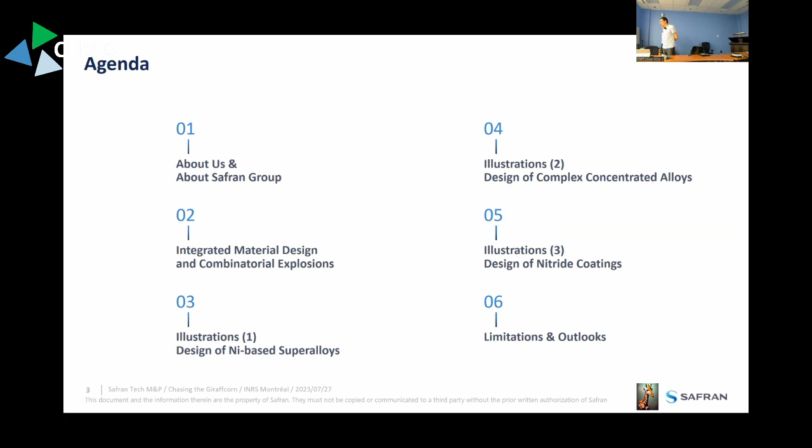And then we'll go through a few examples. I've listed three, I have one more. So I'm mainly going to explain things on nickel-based superalloys. Then I'll go through high entropy alloy design, or complex concentrated alloys as they came to be known. And then we'll talk about nitride coatings, Marjorie will do this part. And then we'll give a few outlooks, which I would be very happy to discuss with you in all generality.

I'm going to just say that the work we're going to present here has been done in a lot of laboratories with a lot of collaborations that I'm not going to mention, but I'm going to present some of my PhD thesis work and postdoc work. So I have been far from alone in this.

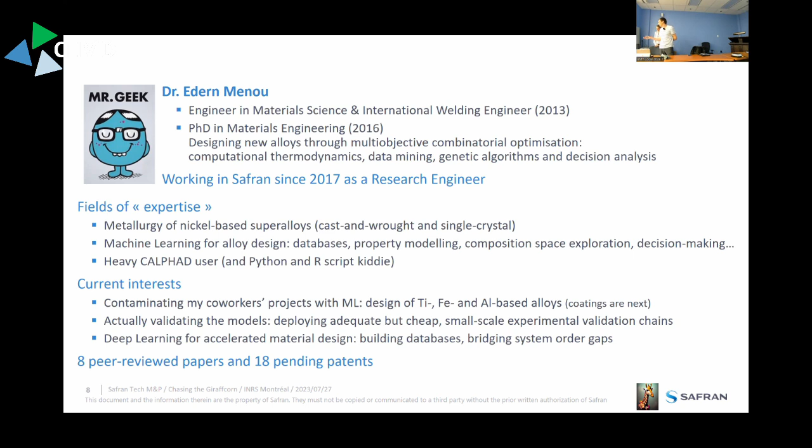But I'm going to just switch that, if you're fine, because I think we all know. This is an actual picture that my PhD advisor used at a previous conference. So I guess this one could have been put in place.

So I'm going to let Marjorie do the introduction of the group, if you want. The idea is just to give you a brief overview of our group. It's something quite big.

We are working in aeronautics, space and defense. Just a few figures, I won't go through everything, but as you can see, we mainly make aircraft engines. We are very well known for this, but also helicopter engines, landing gear, and interiors for cabins. We also work on everything about drones, for example, and some space surveillance, maybe not so well known, and high performance optics. So we did some optics for the Very Large Telescope, for example, or for space telescopes.

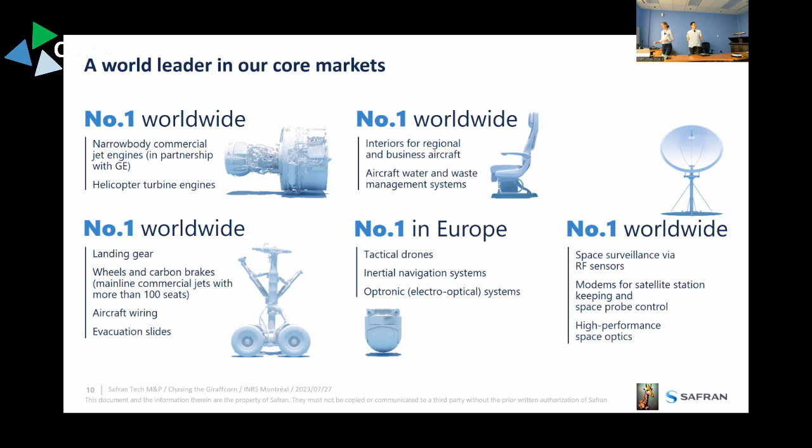We are a French group, so really French, you can hear it with my wonderful accent, I know about it. But we are around 83,000 people, you can see, in almost 30 countries. What you can see is that in Europe we are more than half of the group. And when we say in Europe, most of us are in France. We have some people in UK, Belgium, Spain, and so on, but the big part of the group is in France.

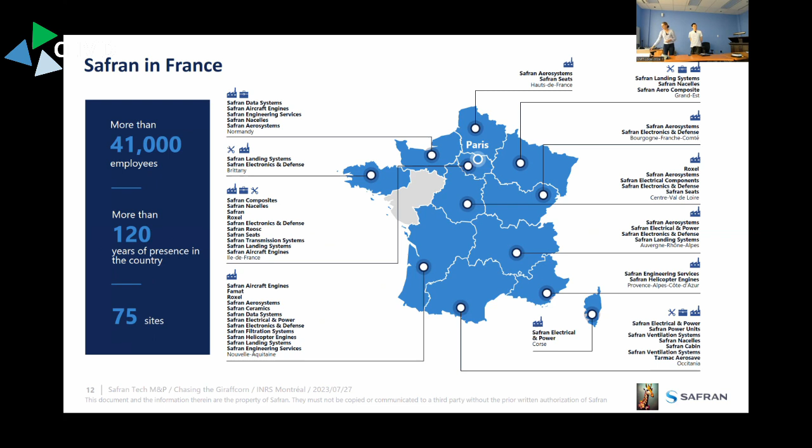Safran is here, but we are also in Canada, so that's why we have a lot of collaboration with Canada, because we have employees in Canada. Most of them are in Quebec, but not all of them. You can see we are in Mirabel, Kirkland, Ajax, London, and Peterborough, so let's say almost Toronto. It's quite far away from Toronto, in fact, but it's some big companies of the group.

As you can see, electronics and defense, we also have a landing system in Ajax, Safran Landing Systems, and Safran Helicopter Engines. Our colleagues that are more recent in our group, Safran Cabin, maybe you know them as Zodiac. We just bought Zodiac Group in 2018, I think, something like this. So now we also have everything about cabins, which we didn't have a few years ago.

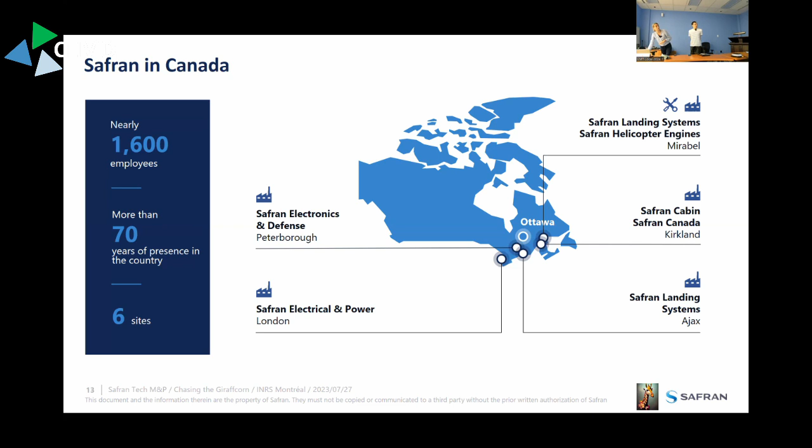Just a few overview of our product. We work mainly on aircraft propulsion. So when we say aircraft propulsion, it can be aircraft engines, helicopter engines, but also nacelle and engine equipment.

What you can see on the right of the slide is a power transmission for engines. So it's quite an important part of the engine.

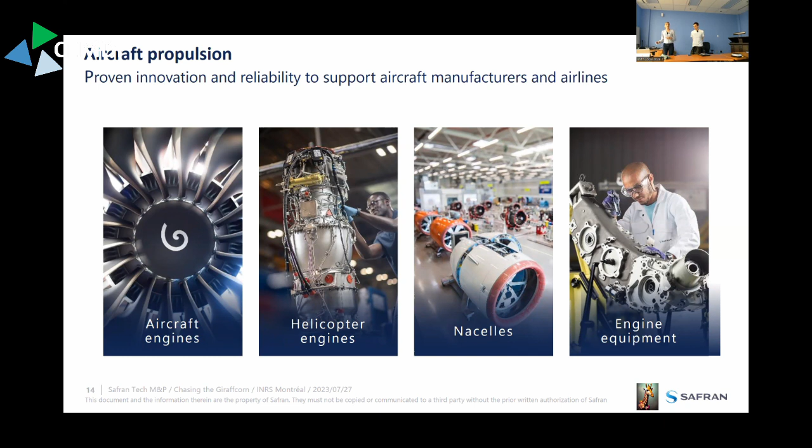We have also some aircraft equipment, so landing system. When we say landing system, it's both landing gears, but also wheels and brakes, so carbon brakes, for example.

Everything about electrical system, I didn't put the slide here, but there is one I like that says in a traditional commercial aircraft, you have around 500 kilometers of cables. So it's just huge. We know how to organize, to put everything as it should be together.

Something quite funny also is to know that it's just people doing by hand. Everything is done by hand when we speak about wiring in an aircraft.

We have a big activity on avionics and electronics. So everything about guiding for military aircraft, for example, but also for commercial aircraft.

And when we say aerosystems, it's safety equipment, for example. So the slides, for example, it's also made in Safran.

For a few years now, we have what we call aircraft interiors activity. So you have everything about the cabin, everything about seats and passenger comfort, entertainment.

Maybe some fun facts when we say cabin. We have everything in the cabin, but also galleys, toilets, water management. We say water management, not toilets, but we also do toilets. Okay, somebody needs to do it.

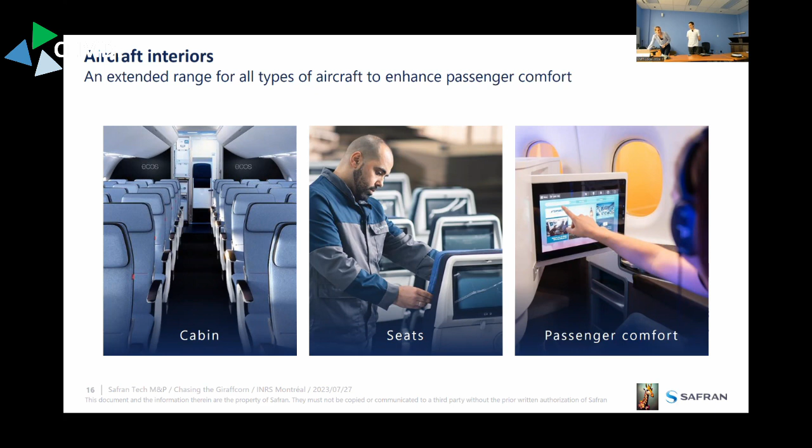And if we have a look to defense activity, everything about navigation and guidance. So for aircraft, for boats, for example, can be for almost every vehicle, in fact, depending on the precision of the navigation and guidance we need.

We have a lot of optronics for soldier. Drones and robotics. There is one drone that was fully developed by Safran, that is the first French drone. Up to now, we were using even in our army American drones because we didn't have our own one.

What we call dismounted warfighters. Let's say everything that will help a fighter when he is really all alone with nothing to help him. And we have some guidance solution for missile, for example.

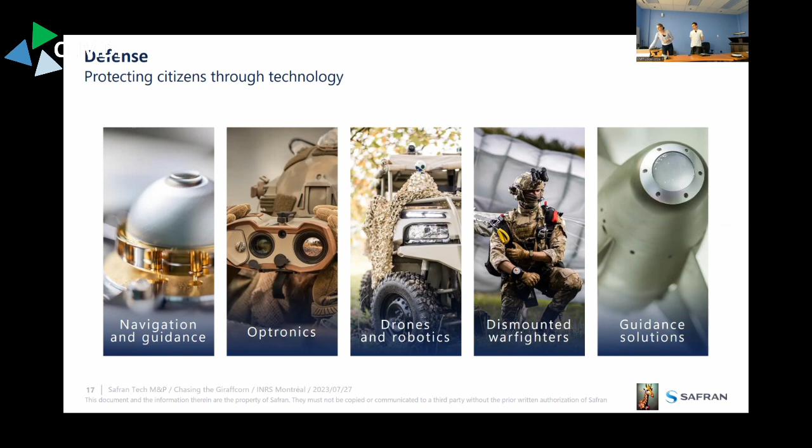If we move to space, we have everything about launch vehicles. So it's through a joint venture. Before it was everything in Safran, and for I think 4 or 5 years now, it's through what we call Ariane Group. We have a very specific activity on satellites that is all about plasma physics, so I can speak of plasma physics here.

It's very, very nice. It's what we call a plasma propeller for satellites. So we have the very small one, only for positioning in space, and right now we have bigger ones.

When you launch using your rocket or whatever, now we can use only electric plasma propulsion to go to the right place. So it's something very new.

The first ones were launched 1 year ago for some defense application in France.

We also have a lot of work on ground station and how they communicate together and with space. And everything about space optics, we have a small company totally dedicated to space optics in our group there in France as well.

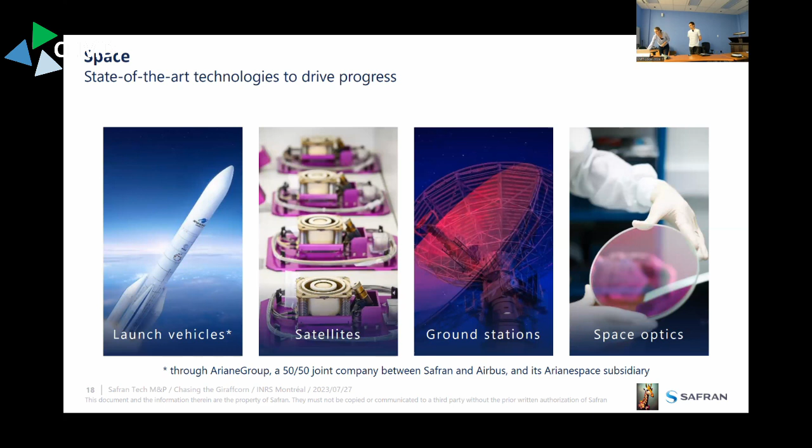Just to show you, I won't comment at all. I have 4 like this, I won't comment. The idea is just to show you in Safran, we do, let's say, almost everything in an aircraft, but the aircraft itself. So everything inside, it's us. The aircraft, it's not, it can be Airbus, Boeing, or whatever. But we have really plenty of products with a very different technologies, materials, application.

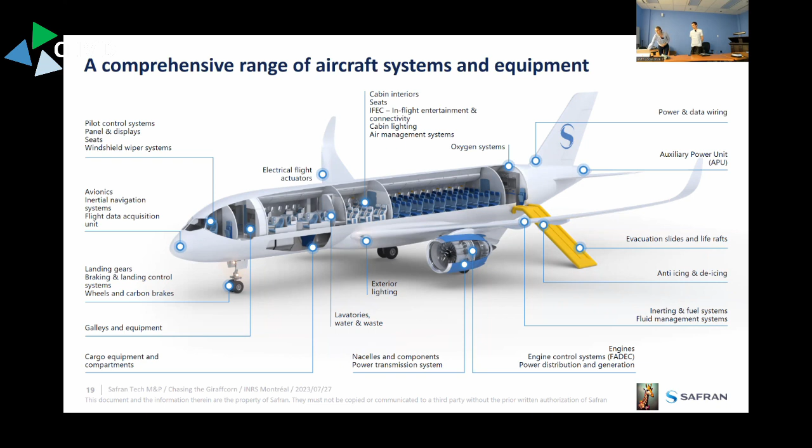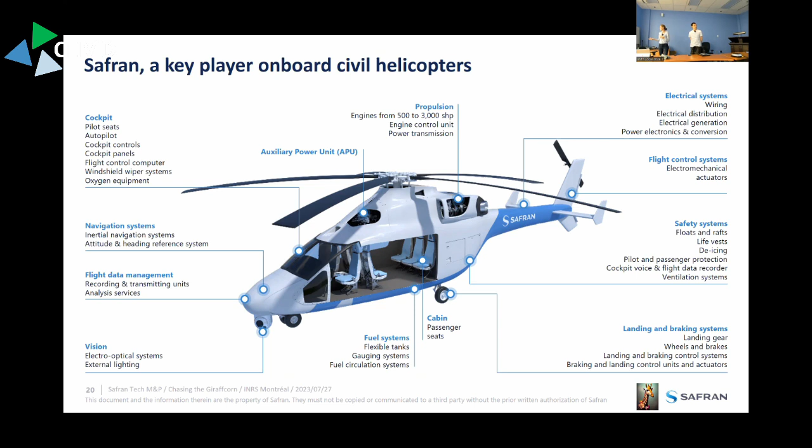If we move to commercial helicopter, as you can see, it's almost the same. So we can see some funny things such as flexible tanks, for example. So on one side, we are going to make very specific metallic materials, but we also work on very specific polymers, for example. And we have the same for military helicopters, as you can see there.

And if we move to military aircraft, it's the same. We do also very specific engines for military aircraft. In France, our military aircraft are wholly French. So the aircraft is from a French company and almost everything inside is from Safran.

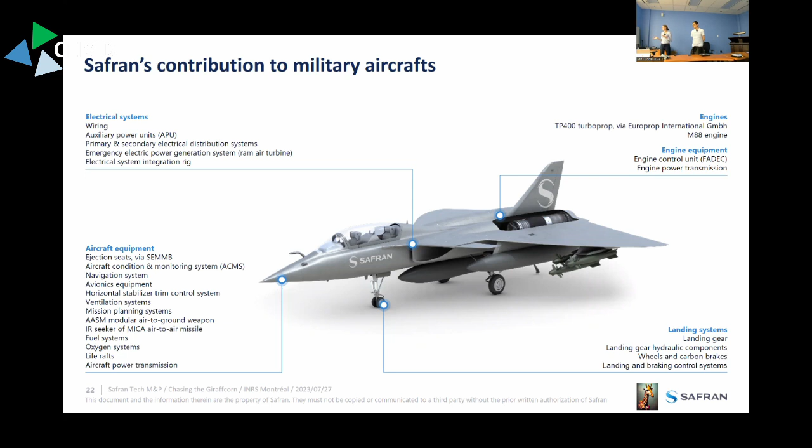Just a few figures about innovation. I won't tell you about revenue of the group and so on, I think it's not so interesting today. But these figures show what we invest every year in R&D. It's quite a huge figure, really huge.

Something not written here is that it's around 10 to 12% of our annual revenue that is invested each year in R&D in our group. So it's quite impressive. The second figure about employees in R&D is also interesting to comment, because we have a way to do that which is quite special.

When you see this figure, not everybody is fully working in R&D. A lot of our colleagues in business units, for example, are partly involved in R&D. They can work on whatever in the factory, but 10-20% of their time is dedicated to R&D and working on R&D projects linked to their work. So it generates a culture of R&D in the whole group, all over the world.

As you can see, the big part of our budget in R&D is dedicated to environmental impact of air transport. So it's not new, it's not since the COVID crisis. It's very, very old, I think. I always saw such figures for the 10 years I'm in the group.

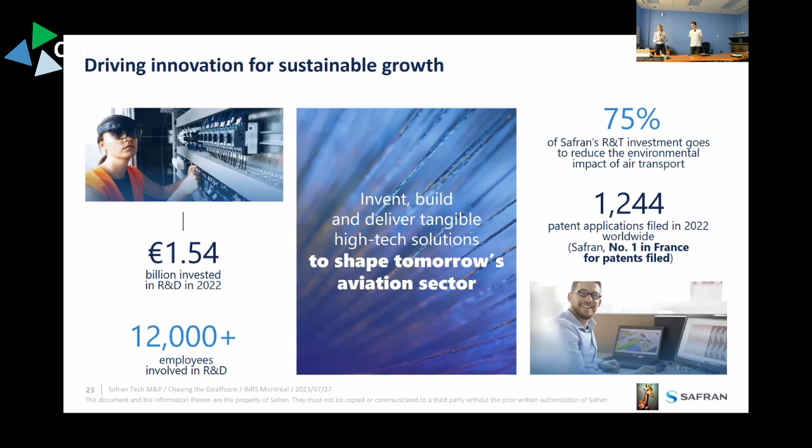Just 2 slides, I think, on decarbonization of aviation, because of course it's our target, we need to contribute. I just would like to take a little time to comment on this one specifically.

We are, let's say, between 2020 and 2025. Due to the increase of commercial flights and so on, we know that we will have more and more commercial flights and commercial aircraft. So if we just do nothing, it won't be possible. There are several ways to reduce CO2 emissions, and here we just put the various contributions.

We try to move to, let's say, disruptive technology. What is behind this? Our last generation of engine was CFM56. When we moved to the LEAP engine, a brand new one, we reduced fuel consumption by 30% and noise by 50%. We are now working on the next generation.

We will do the same for the next generation. So with 2 generations, you can see that we really drop everything about fuel consumption, noise, and we can speak also about CO2, NOx, and so on, everything that goes with it. What you need to know is that when we start to work from scratch on an engine to when it is going to fly, it's 30 to 40 years in commercial aviation. So everything takes time. To reach such figures, we started to work on it 50 years ago, something like this.

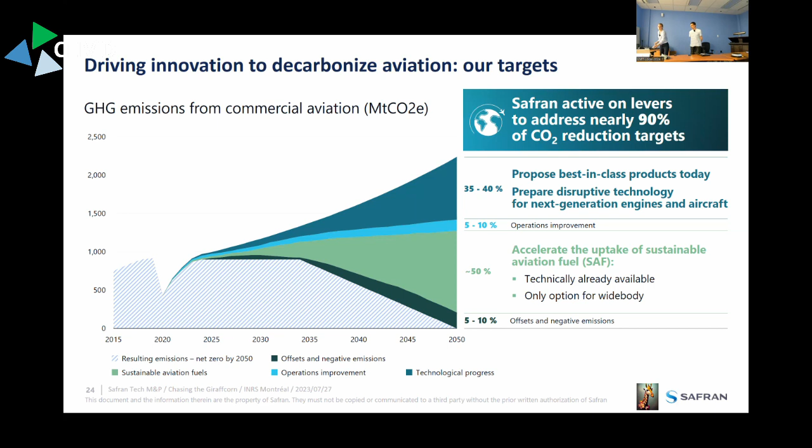So our roadmap has 3 main points. First, we want to move to ultra-efficient aircraft. It means that we need new engines. The brand new one is 2 years old, but we are already working on the next one, for years and years in fact. We want to decrease fuel consumption, of course, but you also need light materials, because if you want to decrease fuel consumption, you need a wonderful engine, but you also need to be lighter and lighter and lighter.

We also move to more electric aircraft. What I mean there is not that we are going to put batteries and just take off on batteries. It won't work for very long flights or whatever, but for example on commuters it can be an option. So we are working on those options.

We are also moving to low carbon fuels. It can be low carbon fuels, but there is also a hydrogen solution. As you can see, it's written hydrogen solution and not engines. Right now we are working mainly on fuel cells, because fuel cells can be used right now, in 2-3 years, as auxiliary power units for example. They can be used on the ground. To move to a hydrogen engine, there is a lot of work. We can do it, we work on it, but it will be, let's say, later.

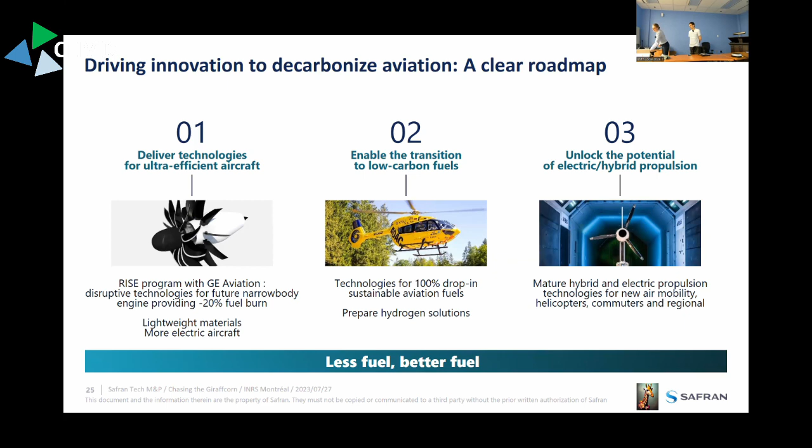So with this explained, I think you get why material development is of importance to the group, because a lot of improvements come from the improvement of the material that our products are made of. Now, material development is not an easy task, obviously. The way we're going to present that, I told you, is through combinatorial explosion. And I selected a quote from a work of a few years ago from a company called Citrine Informatics that I like a lot.

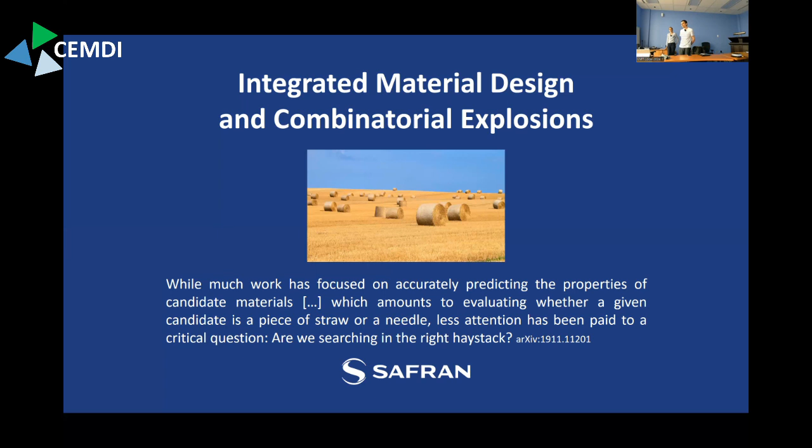And I think the question they're asking is very relevant to us, which is that the space of all possibilities is so large that the first question is more: where do we find the interesting materials? And the second is: how do we find them? So finding the right haystack is a task in itself. And the way to show that, I think, is very naive, and you're going to have to bear with us. We're going to take an example from the point of view of the chemist, let's say, and another point of view from the physicist. I do alloy design, and my playground is that - this is the playground of most of us, anyway.

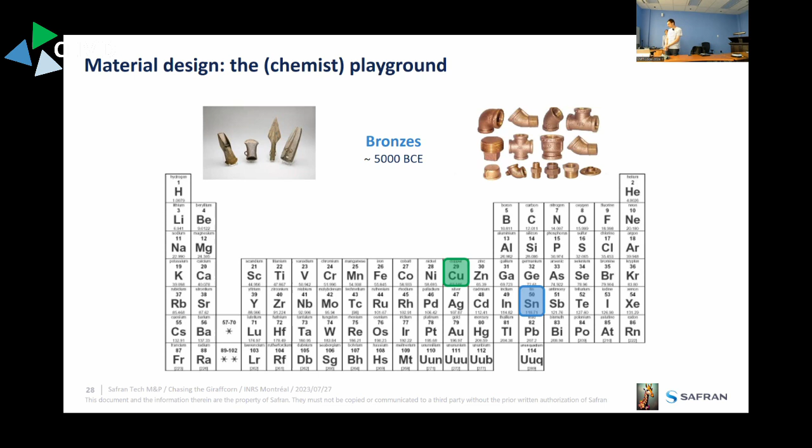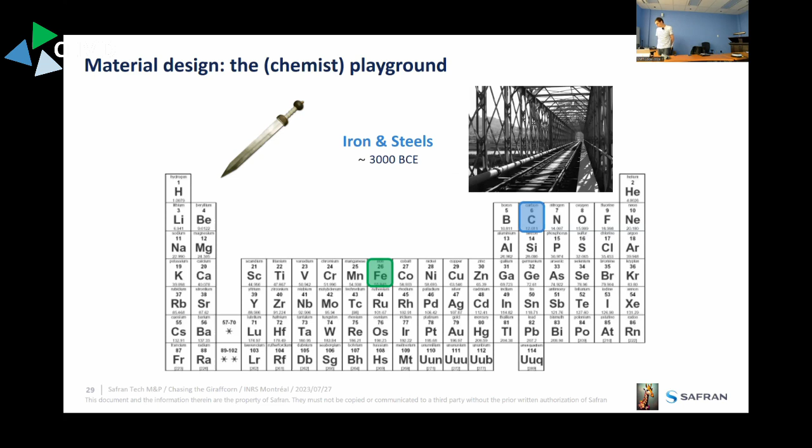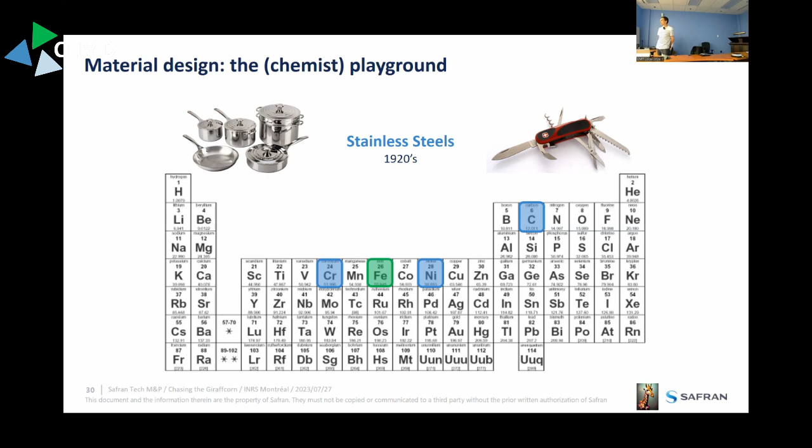And the way you can introduce alloy design is through the ages. The first one being bronze, which is a mix of copper and tin. Then later comes the mastery of iron and steel metallurgy, which played a crucial role in the Industrial Revolution, for example. And then much more recently, you can trace back the discovery of stainless steels, also steels with chromium and nickel. They were used in aeronautics for a time, but quickly showed some limitations. And so were introduced superalloys.

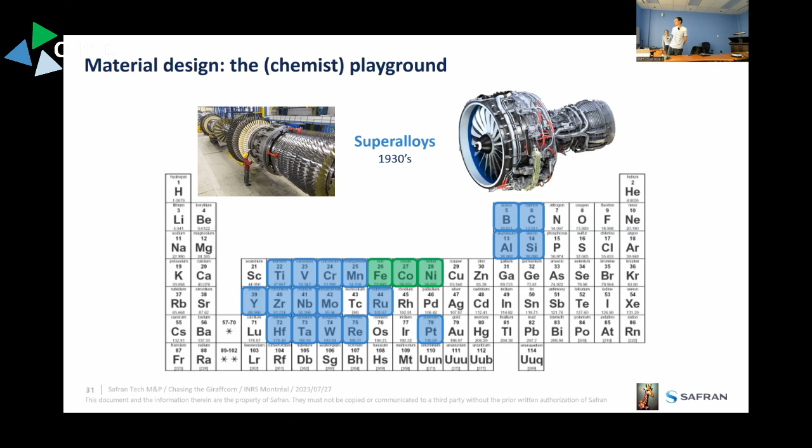And then you can see the start of something complicated. So you have nickel-based alloys, but you also have cobalt-based, iron-based, and a mix of the three based. And then much more recently, some crazy people said: why do we need a base element when we can put approximately the same amount of each of them? And this is the start of what was initially called high entropy alloys, and which has become known as complex concentrated alloys. There's complex in the name, so it's difficult.

The thing is, you can make these alloys with a very large number of components, and even pruning the space of all possibilities by selecting only alloys with at least 5 components - say you create alloys based on 55 elements, each with 50 possible weight percents. That's not far-fetched, because that's like from 0 to 5% in steps of 0.1%, which is very realistic even in industry settings. And so you already have a lot of systems, 10 to the 16. You have even more alloys, which is the pure combination of our alloys - it's a simplified calculation, but bear with me. The philosophy is that comparatively very few alloys have ever been elaborated, produced, and tested - even fewer actually.

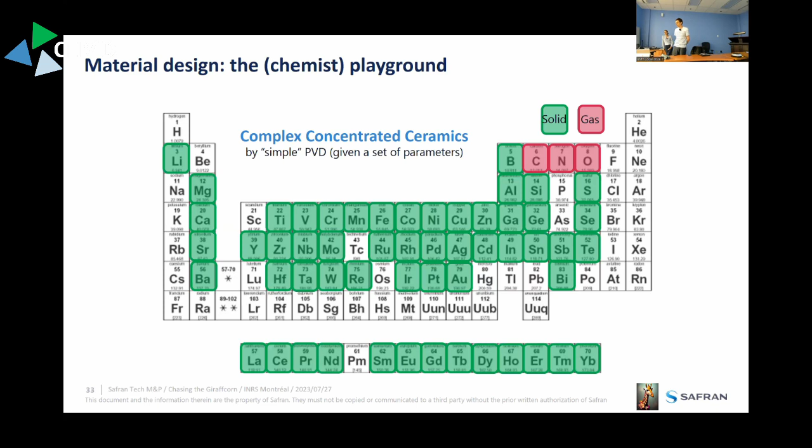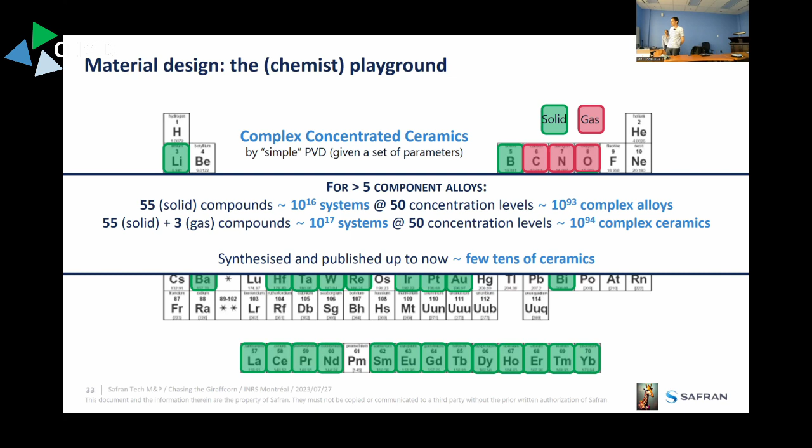And actually it can be even more complex, because what Marjorie does is ceramics as well. You can think about complex concentrated ceramics where you add nitrogen, oxygen, carbon, and so it complicates things a lot. So you have a bit more order of magnitude. This is ridiculous, and it's even more ridiculous since you can consider that even fewer ceramics have been made, and even fewer are reported in the literature. So it's a big problem.

Now from the point of view of physicists, we were talking about composition, but that's only half of the situation. The other half is process, because the chemistry does not give you the properties. You have to have process.

We just took an example in plasma physics, because I mainly do plasma physics. I know a lot of you know about plasma, so I'll be very short on this one. But in a plasma you have a lot of things: neutrals, atoms, molecules, you can have both of them of course. We can have radicals, ions, positive ions, negative ions, electrons. You just mix everything. Each population has its own energy distribution, temperature, velocity distribution, and chemical reactivity. So we can see a lot of combinations right now.

And if you move to a more macroscopic level, we know that the plasma is globally neutral. So I just told you there's almost everything, but let's say it's globally neutral. But it's also sensitive to electric fields and magnetic fields. So what we can guess is that we have lots of parameters, lots of correlation, but it's not so easy to measure everything. Some of them are almost impossible to measure accurately.

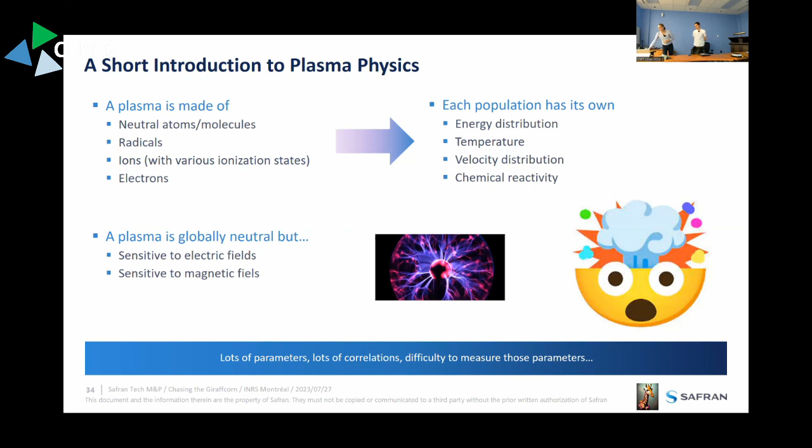So if we take the basic plasma parameters I have when I am in front of my equipment, I just want to make a plasma in my machine. I have pressure - let's say I work in low pressure plasma, so 0.1 to 10 Pascal. The gas flow - I work on equipment where I can move from very low gas flow, 1 sccm, to a much bigger one. When we say gas flow, we need to think that we have a neutral gas to do the plasma, let's say argon for example. But I can also use some reactive gases, and I can put 1, 2, 3, 10 if I want. So a lot more values to add.

Let's talk about temperature - not atom or electron temperature, but just your substrate temperature. You can work from room temperature to, let's say, 400 degrees. We can go higher if we need; it was just for the example.

Then one very basic parameter is target power. I do PVD, physical vapor deposition. I just have a target, I put power at the back, and it gives me something. I can go from, let's say, 5 to 200 watts. It's not very big power, to be honest.

But if I want to do some complex alloys, as Edern showed you just before, I need one target per material. So if I need 5 materials, I need 5 targets - so the combination of all of this for 5 different targets. I can also just use the distance from target to substrate, because it's going to change the microstructure, so the properties of my materials at the end.

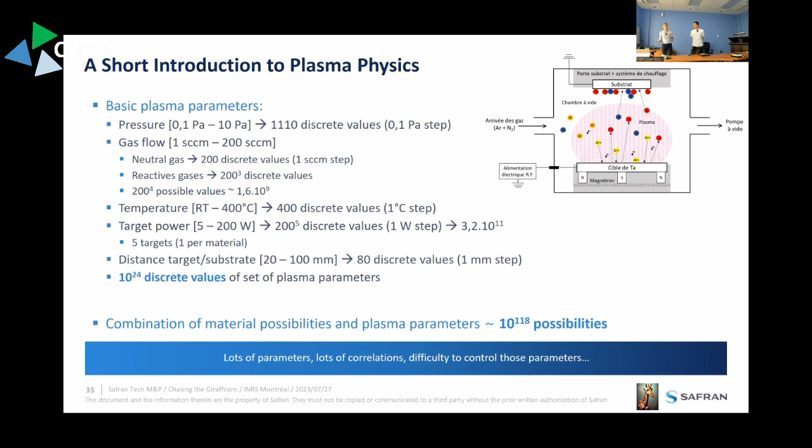And now, I love PVD. It's very nice, but I prefer HIPIMS PVD. HIPIMS is for high power impulse magnetron sputtering. It means I do conventional PVD, but instead of having a DC power signal or a pulse power signal,

We are going to try to play with duty cycles, so from 1 to 100%, meaning when I'm around 100%, I move to DC. But we can do the whole thing on the same machine.

If we add all these parameters to everything we saw before, we have a combination of material possibilities and plasma parameters that is just ridiculous. It's really too big. And the most important point is to understand that each point can be a specific material, meaning I will have maybe the same chemical composition, the same microstructure, but not the same texture.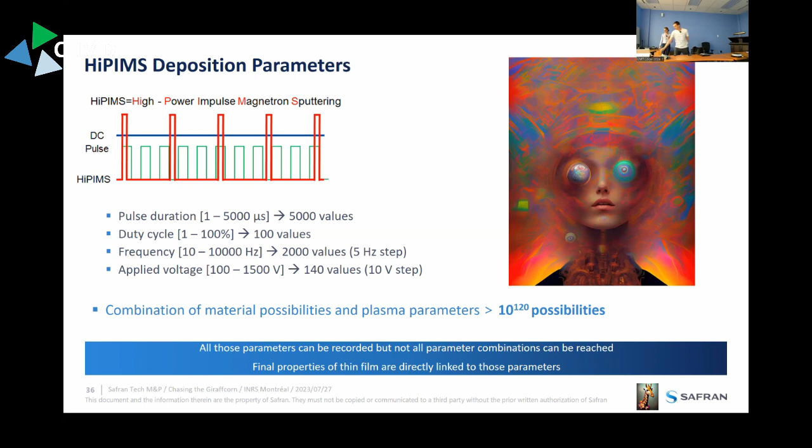I think the next one is yours. Yeah, the next one is just a summary of how big - I don't know what it is, but it's like you have a bunch of a pile of haystack and you don't really know where to look. I just put this morning the age of the universe converted as yoctoseconds or femtoseconds,

just to give you an idea of what the percentage means. And I find it interesting, as Marjorie said, not all materials are interesting or even possible. So it's a very rough approximation that we should obviously correct. But I think that even with corrections, the number of possibilities is so huge, so numerous, that there must be some room for improvement.

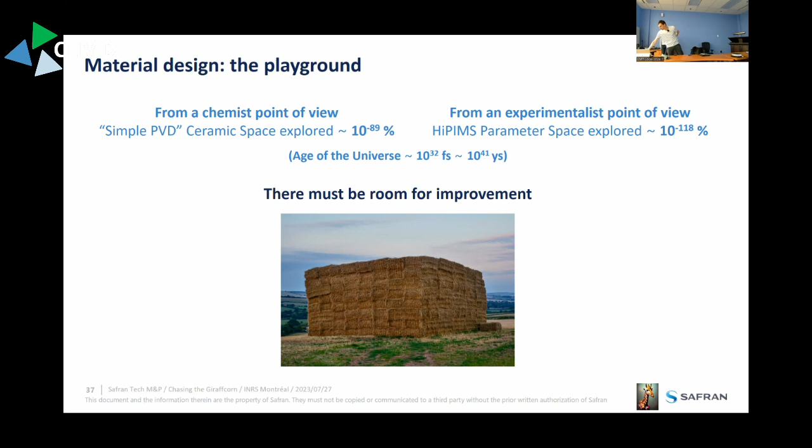I'm going to show you an example on nickel-based alloys, and we hear a few times a year people saying nickel-based alloys are done. I mean, even without going to such an exercise, such a length, you can find that we can do 10 to 10 alloys. So it's not possible that we have explored everything. So there's room for improvement. The question being, how do we

exploit this? And I think I see the time flying. I think we're trying to accelerate. We just showed you something which is very philosophical. Now we're an industrial group and we have industrial challenges. And I think you get the idea that we have to improve the performance, but we also have plenty of other criteria when doing our design.

We have to keep costs down. We have to keep the materials as repairable materials or repairable parts. We have to comply with evolving regulations that allow certain materials and forbid others. And we have to keep in mind that the engines must go out of the factory in time. This has a whole lot of implications when doing alloy design. We will touch on that a bit later.

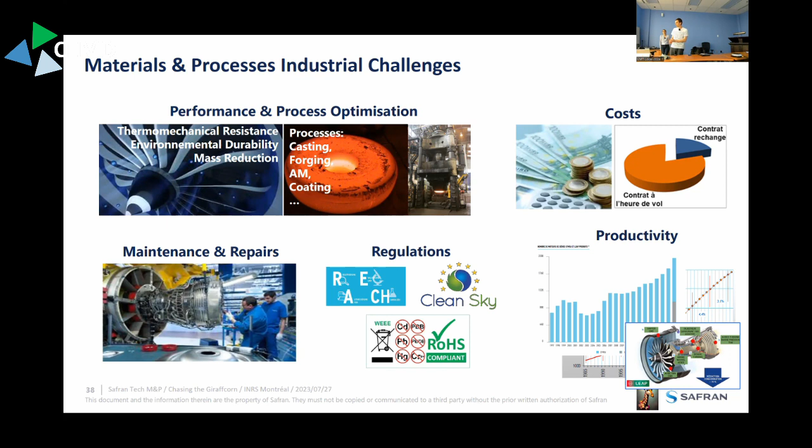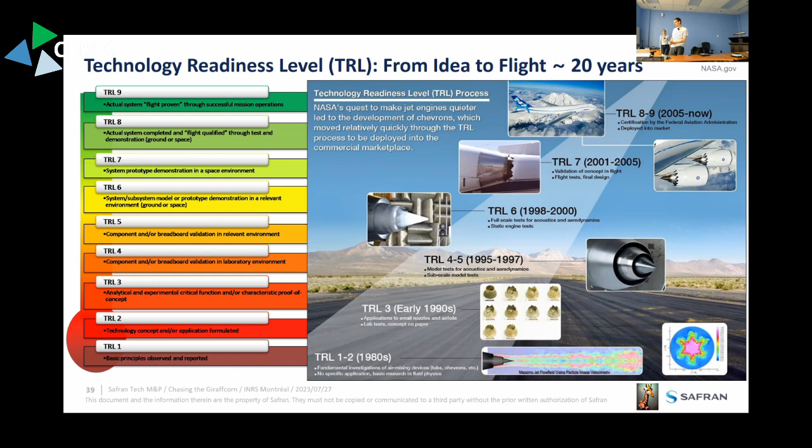I'm not sure this is essential to the presentation. No, the idea is that I will just emphasize what Marjorie said earlier. The time of development in aeronautics is very long, and we're talking about 20, 30 years of development for a material, for example. The way the maturity of a technology is ranked is through TRL, and this is where computational material design can help by going faster through these TRL levels.

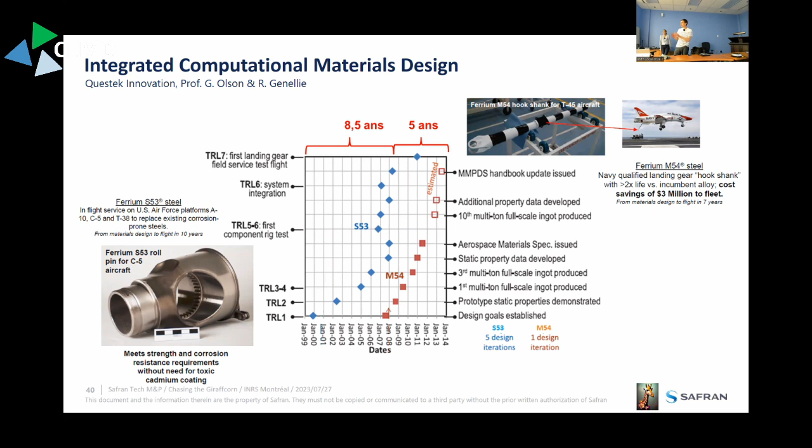This is an example from Questek Innovation, a company based in Chicago, I think, at Northwestern University. These examples are about two steels, and they show that by using as much modeling and simulation as possible, they were able to compress the time needed to go to higher TRL. This is the idea we're aiming at, and there's a whole ecosystem like the MGI in the US, the Materials Genome Initiative, launched in the early 2010s, that involves integration of experimental tools, the traditional way of doing things, with more recent tools like computation, modeling and simulation, conventional computational tools. And then the last part, where we see artificial intelligence through the lens of data-based models, from data and empirical-based models.

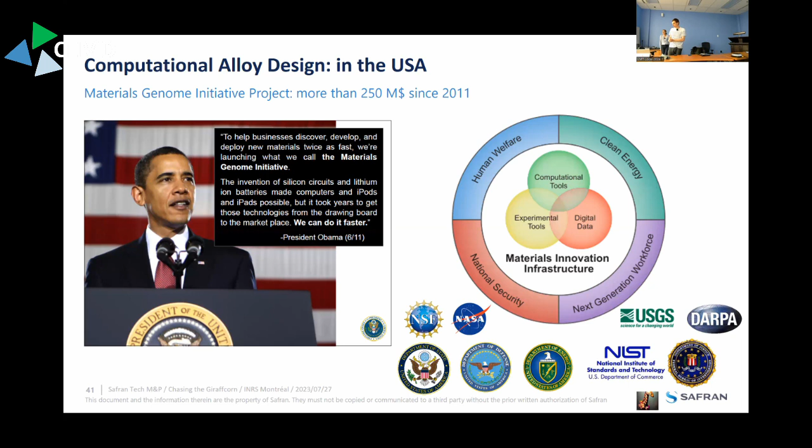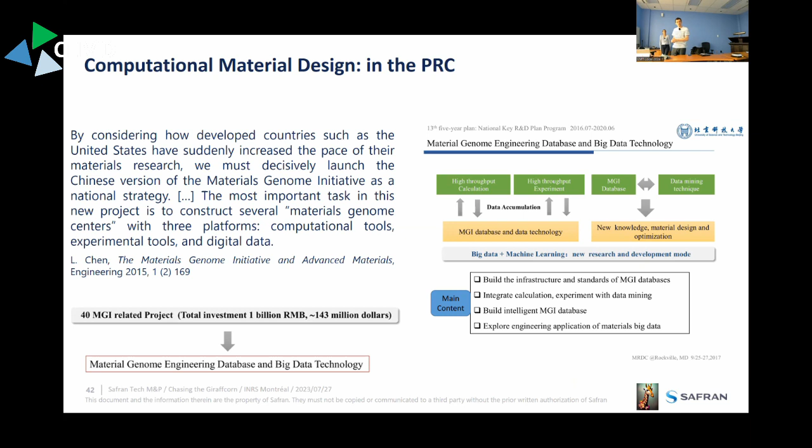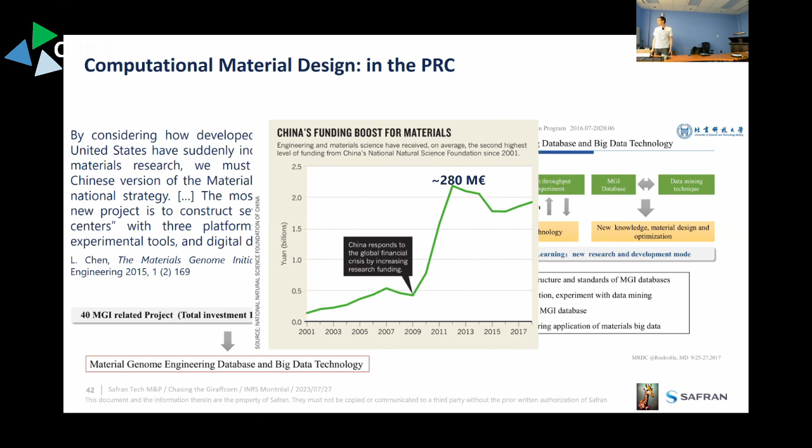It is interesting to note that the situation is quite similar in China, which I will leave you the slides to read. The author is a member of the Academy of China, and they basically copied the MGI and adapted it to China. I'd point out that the funding for material science in China has been increasing over the years. The graph is from about 2 years ago, but I think the trend would be the same today. I just mentioned that in France, an 80 million euro project, a similar project, was launched last year.

Now, when talking about material design and our design in particular, we usually present the usual triptych of material: composition, microstructure, and properties. The process is hidden behind the microstructure, this is a simplification. So the usual way of doing material design, very simplified because we don't have much time, is going from composition to properties, and this is the guided-by-science way of doing things. This is serendipity sometimes, and it's perfectly fine because cars are running and planes are flying, so that works, and that has led to the development of very successful alloys.

But now you can see 10 to the 18, 5 alloys on one hand and one use case on the other end, and you can tell yourself, isn't there a more efficient manner to design an alloy? I think many people think you can do the guided-by-product approach, which is the alloy-by-design or material-by-design way of doing things. The idea is that you know your application well because you know your product well, so you can select a very limited subset of the space to guide you. By knowing the properties you're interested in, you know which ones you have to model, typically, and which ones you have to have data for.

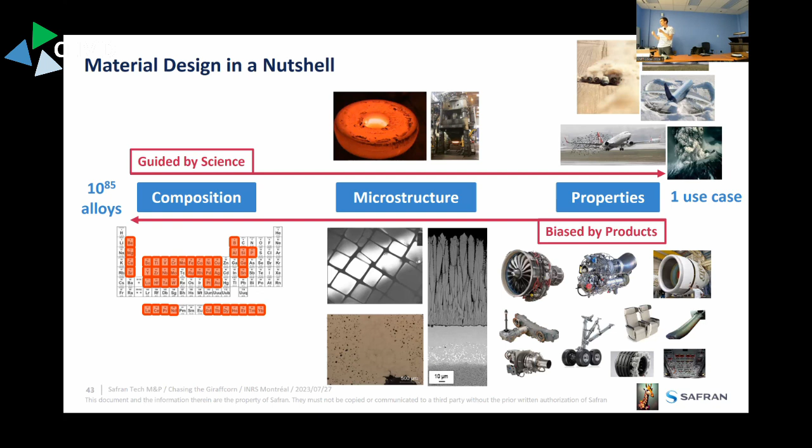Going from composition to properties is theoretically sound, but what we need is to screen the space of all possibilities to be sure to find an actual material. To do that, we need to link the composition to the properties. We have to get the composition dependence of the properties, which is rarely seen in the literature. So what we see, this is very simplified, and I hope you will pardon me.

There's plenty of modeling techniques at different length scales and time scales that work well. I'm going to simplify things and say what I'm interested in as an industrial researcher is macroscopic properties, and even more, performance, which is related to properties, which is more macro. So I would like to go from composition to performance. That's what I would like to do. But at the moment, you can't really predict, say, mechanical resistance with DFT calculation. That's not possible.

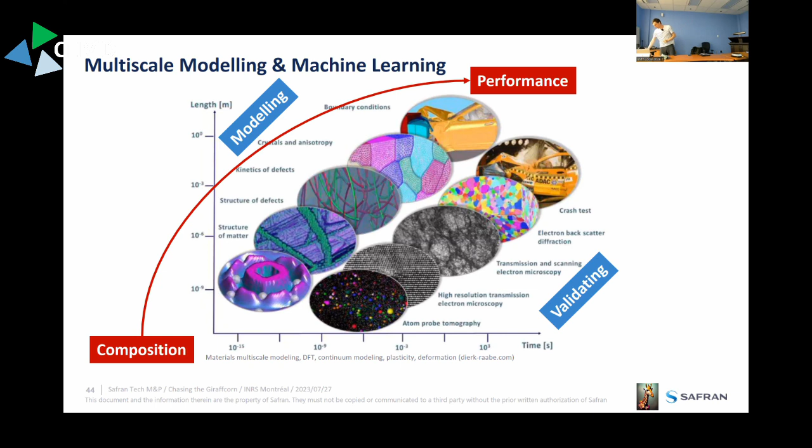So the idea, our philosophy, is to use multi-scale modeling where it is relevant, but then achieve quick wins by avoiding the physical description that are needed for macroscopic properties. That's a simplification, and there's a lot going on in this. This could look bad, but there's an example that shows it can work. I'm going to accelerate. This slide will come to the end as well, but this is really where discussion is welcome, because this is opinionated.

This is opinion. The way we introduced this concept at Safran was through methodology, which we call numerical metallurgy. Looking at the left-hand side, you have something that I think looks rather logical to you.

We have data. If we don't have data, we generate them. Once we have data, we use them for assessing physics-based models or data-based models, depending on what I said before. And once you have validated these models, you can use them for optimizing composition or processes. And once the optimization is done, you have to validate what you've predicted as interesting material or process parameters. So you have the whole synthesis and testing part.

Now, there are authors that classified the different paradigms in material science from the first to the fourth. So the first being purely empirical science, going to model-based, then computationally based, and then big data. There's no real big data in material science, but the idea is that there's no replacement of the previous paradigm, there's just completion, just assistance from machine learning.

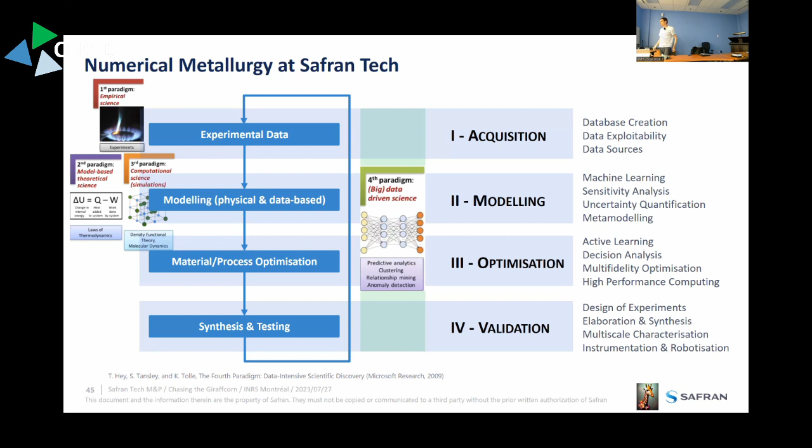But I would like to insist on the fact that I think machine learning can help on the four axes that are here: either the data acquisition, the modeling of this data, the optimization, which is machine learning sometimes, and the validation as well. So you have a bunch of concepts that will come back later, but that are current research interests in Safran or our partners.

So I'm going to go through the first example, and this is an actual joke from my PhD advisor. So you know why I do jokes now.

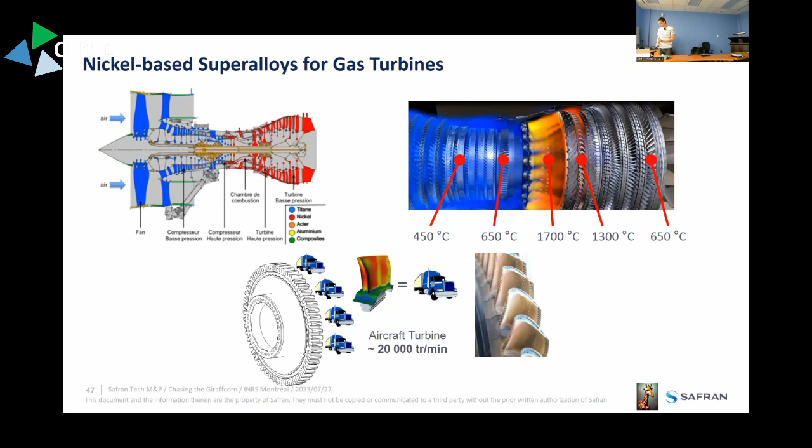Just as a quick primer on nickel-based superalloys: they're used a lot in gas turbines because they have excellent microstructural stability, environmental resistance, and mechanical resistance at high temperature—high enough that titanium alloys or steels cannot be used. So they are used either for the discs or for the blades. Blades are subjected to really high temperature and really high mechanical loads, which makes nickel-based alloys at the moment the most realistic option for these engines. And this motivates the development of novel alloys.

As I showed you in the introduction, you can see that these are increasingly complex alloys in terms of composition, with the addition of more and more elements. But they are also, from a processing point of view, increasingly complex alloys.

It's just a way of saying that from 80 years ago, they were cast and wrought alloys or parts. Then they became purely cast parts, and then directionally solidified turbine blades became available, which you can see here on this photographic image. So you align the grain boundaries to have better creep resistance. And then the next step was logically to remove completely the grain boundaries because they're detrimental to creep resistance. So it became the single crystal superalloys.

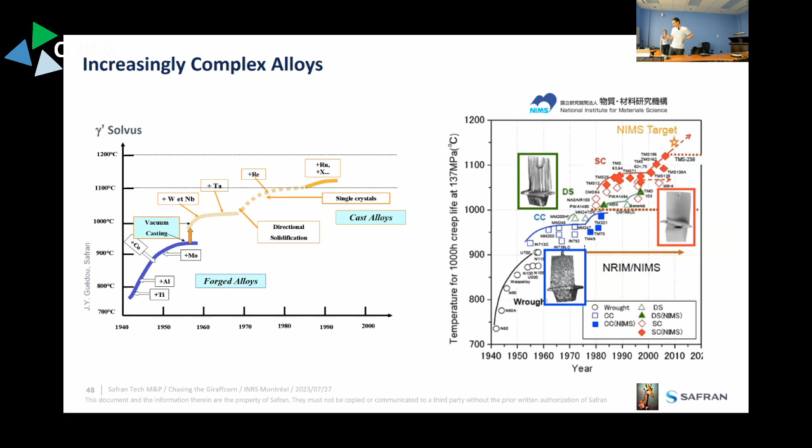And they are very different materials from other nickel-based superalloys, and this has some nice implications. As I showed you in the introduction, there are lots of elements, each of which has its own role, either on solid solution strengthening, precipitation strengthening, or grain boundary strengthening. Then you have environmental resistance—the idea that you have to play with a lot of elements. Nickel is a very accepting element, so it makes things harder.

But what you're looking for, basically, is shown in this phase diagram—this is the aluminum and nickel phase diagram. You're looking to have a gamma matrix with gamma prime Ni3Al precipitates, etc., which you can see the distribution that we're aiming at for these alloys: cuboidal gamma prime surrounded by channels of gamma. This is a very resistant microstructure to creep and to dislocation progression.

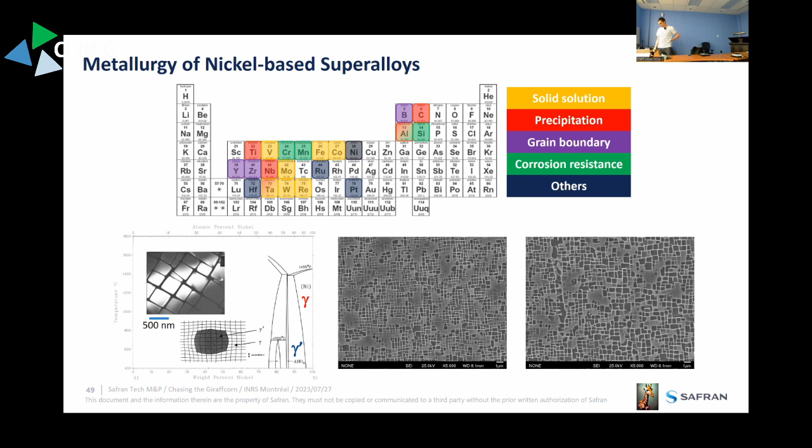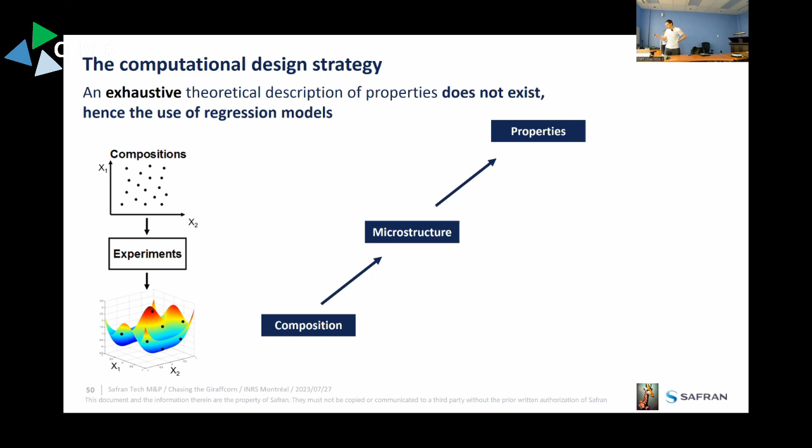So the design strategy—I'll go over this rather fast. The idea is the usual triptych. What we did was not link composition to microstructure directly, but we used CALPHAD, calculation of phase diagram methods, to get information about the constitution. There's no geometrical aspect to this prediction. It gives you the evolution as a function of temperature of the phase fraction, and it allows you to see if a composition is a gamma prime alloy or if it contains other phases that you don't want to have.

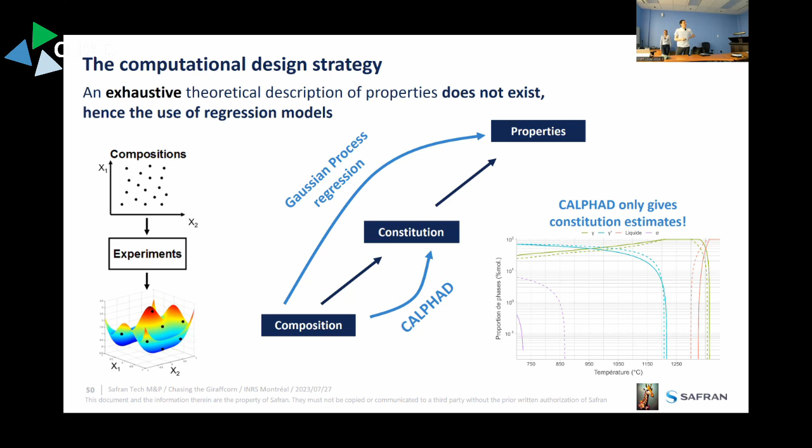And then, as I said before, the idea is that we don't really know how to go from there to there with a physical model, with a full chain of physically informed models. So what we do is regression—and this works very well. I have a colleague who says that machine learning or deep learning is glorified regression, and I think this is right. But for regression that works well, you just need data, and this is where bibliographical study comes into play. There's no miracle, you know.

So what was done during this work was a study of about 500 patents, which led to the construction of a database of about 2,000 lines for time to rupture.

That was about 600 alloys, which is pretty good. That took about a month to do, and there were other properties of interest that's not only creep.

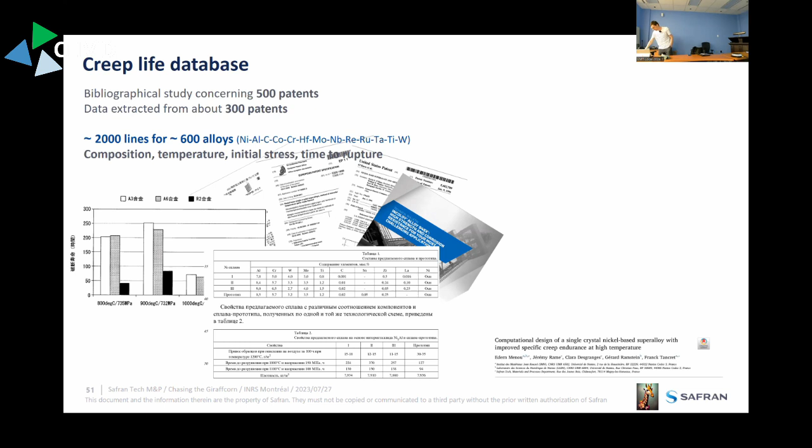Patents can be quite a nightmare because you have a graph in Japanese, tables in Russian, and a whole bunch of languages. But these patents are a very interesting source of data because compared to the scientific literature, they have less constraints, I would say. I was very surprised that you can find so much information in patents, like pages long of creep rupture time given by manufacturers of nickel-based superalloys, which you could never find in a paper.

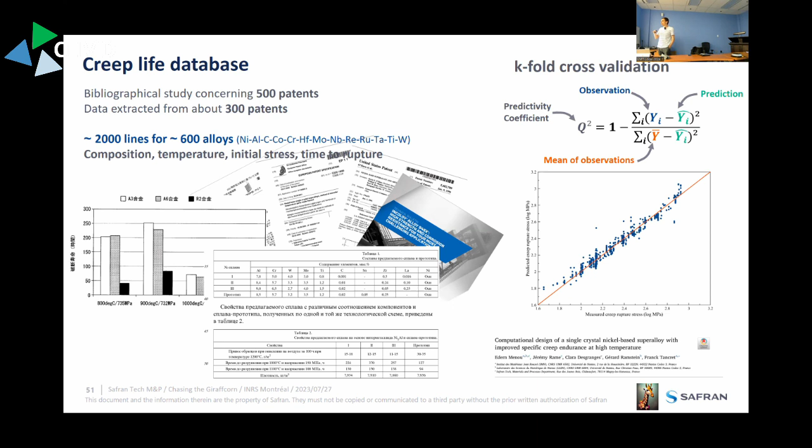So you do validation once you have your model. I'm not going to go into details. If you know the R2, the Q2 is approximately the same, just a little bit more stringent. The idea is that you can have a model that works quite well, that you can see graphically or validate numerically. We had a precision of about 10% with this model, so it's realistic given the usual error of measurement of these properties.

Once we have the model, we have the composition dependence and we can screen large spaces, which is what we did. You have the boundary of each element, which are very broad for nickel-based alloys, and the steps we defined for each element gave a space of about 300 million alloys. We had a bunch of criteria.

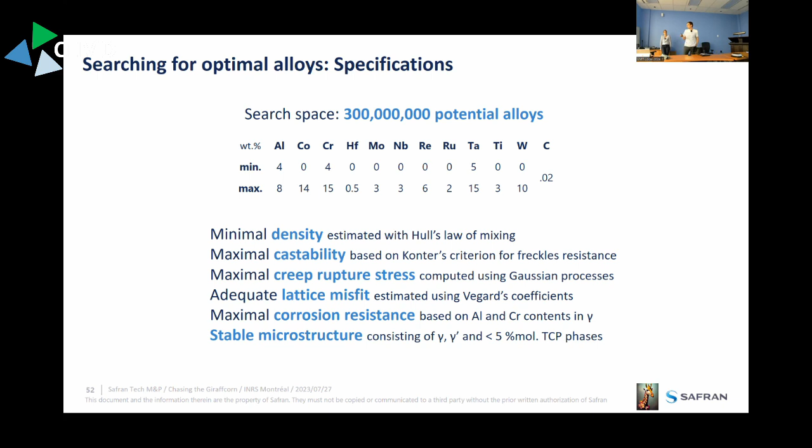Two of these criteria were from CALPHAD calculation, one was from the regression model, and the last three were just rule of mixture or empirical models that we could find in other papers.

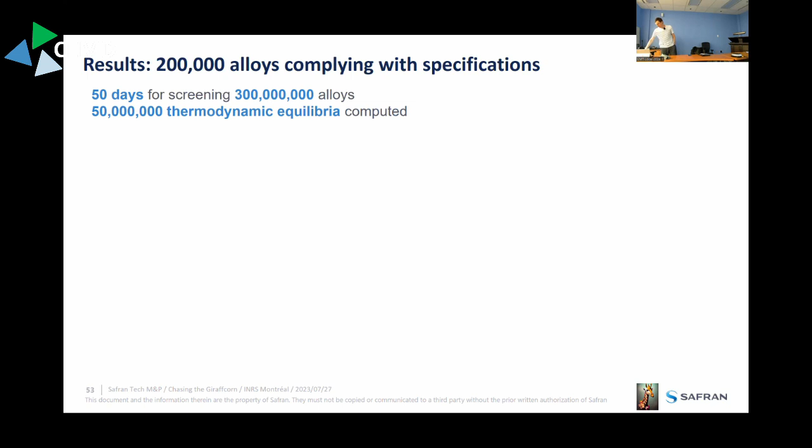So we screened all these alloys. What I love, because CALPHAD calculations are long—200 milliseconds, which for us is long—it took 50 days for approximately 50 million thermodynamic equilibria, because you apply a strategy where you do the cheapest calculation first and the costly ones later.

And you have some results there. On each criteria, we put specification values to attain, and we had about 200,000 alloys that complied with the specification. Those are represented here.

On the left figure, the y-axis is the creep resistance at 950 degrees Celsius, so higher is better. Density is on the x-axis, and lower is obviously better, because lightweight materials tend to resist more since they have less stress applied to them.

The hexagons represent the 200,000 alloys, using hexagonal binning, with the number of alloys shown by color. What you see in red is the existing alloys from the database. I always found this graph nice, because the position of those compared to what we screened showed an increase in specific creep resistance—numerically speaking, the margin of improvement was indeed exploited.

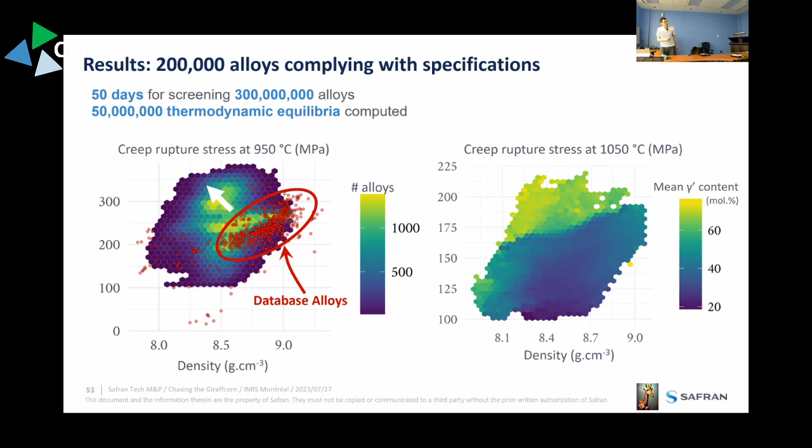What is shown here is that, most of the time, with so many alloys you get representation effects and overplotting, a bit of a problem. But most of the time you can find that the most resistant alloys are the ones containing the most gamma prime. For two models that did not communicate, that's a good result, because it means the physical prediction from the CALPHAD calculation correlates with the database approach, which is reassuring and not always the case. There's also this little point there, but I will not talk about it.

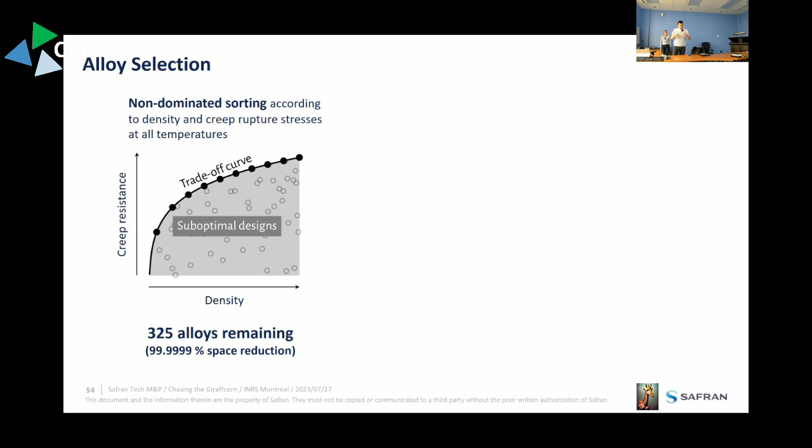So 200,000 alloys is a bit too much, so we tried to select through non-dominated sorting, similar to what is used in genetic algorithms—I'll talk about genetic algorithms just after this. For the record, we validated predictions on these alloys for most of them, not all conditions or all temperatures, but generally they gave us very interesting alloys with mechanisms we did not expect they had.

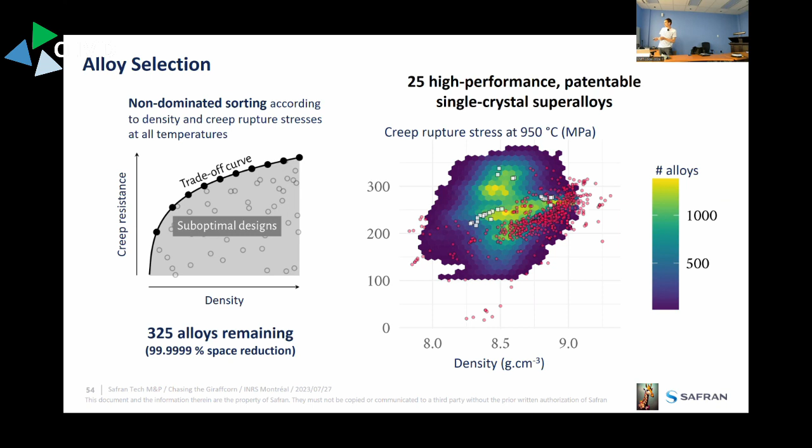I'm going to go over that quite quickly. I have to explain this because there's a graph. So what I showed you before is systematic search, a basic grid search of the space.

But before that—and this is my PhD thesis—we can imagine smarter ways to sample the space, but not completely. Genetic algorithms and meta-heuristics in general can help do that. The comparison to alloy design, well, you're going to see it.

Genetic algorithms work the same as the theory of evolution according to Darwin, basically. You start with a population of giraffes that contains individuals with short necks and individuals with long necks. The short-necked individuals cannot easily reach their source of food, so they tend to die earlier and reproduce less than the longer-necked individuals. Over the years, the population of giraffes evolves into something that contains only individuals with longer necks. That's the idea, and the parallel to alloy design is quite obvious.

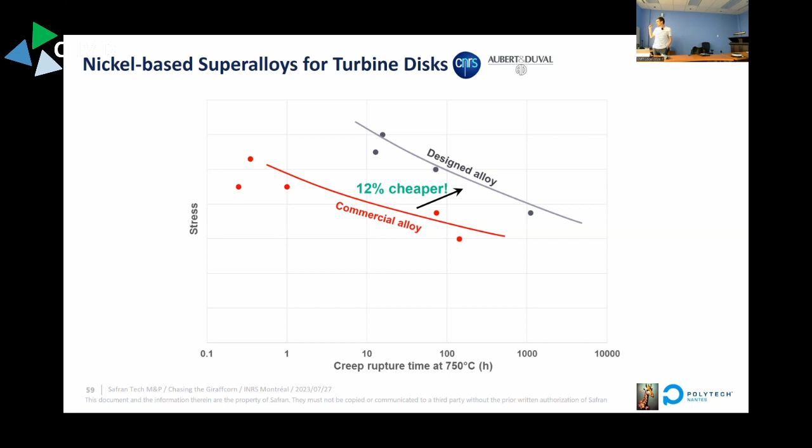The first one is on nickel-based superalloys for turbine disks, done with a company called Aubert & Duval, a maker of nickel-based superalloys. We showed that within the space of one of their patents, we could find a material that was cheaper and better, with better temperature capability than the one they designed, using this procedure. This was experimentally tested under the same conditions. It was really interesting because even within a patented computational space, you can find 10 to the 10 possibilities, since patents are juridic, legal documents, not scientific papers.

So, I'm just going to conclude my part, and then I'll let Marjorie continue.

Complex concentrated alloys—just two examples. The idea was to find alloys with a single solid solution. That was our goal, because that was the original definition of high entropy alloys. Don't ask me why we would want to find a single solid solution—that was a bit of a hobby at the time.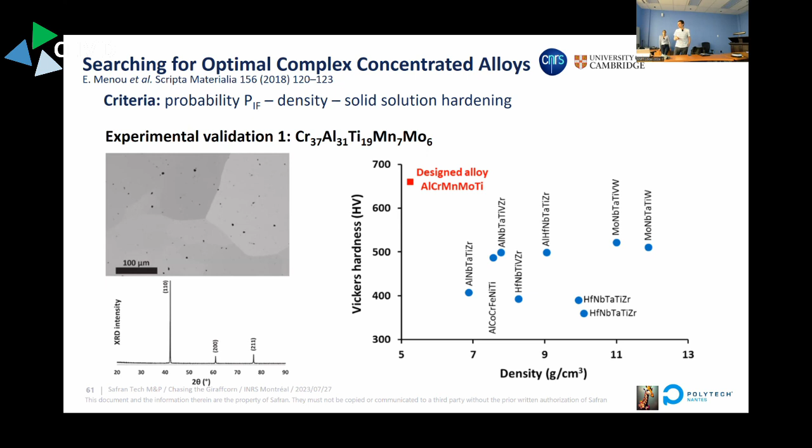The other one is approximately the same, with no other contribution to hardening than that of the solid solution—meaning there's no grain boundary contribution, certainly, or very little, and no precipitate—just pure matrix deformation. Our alloy is there, the red square, and same as before, whether in terms of hardness, UTS, or YS in compression testing, we had something whose specific properties were better than comparable alloys.

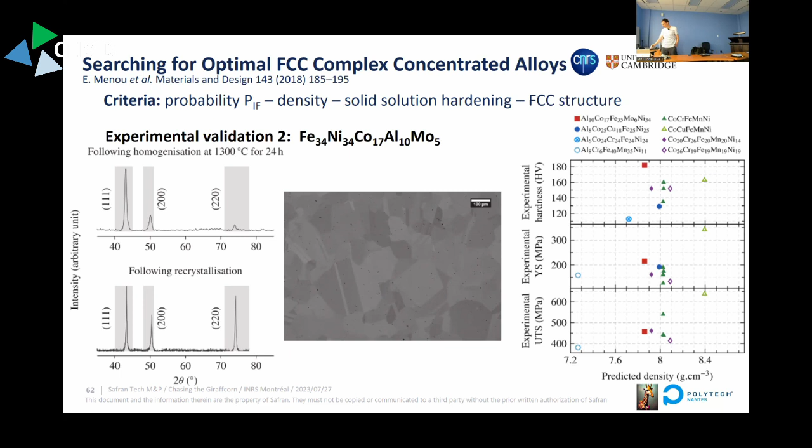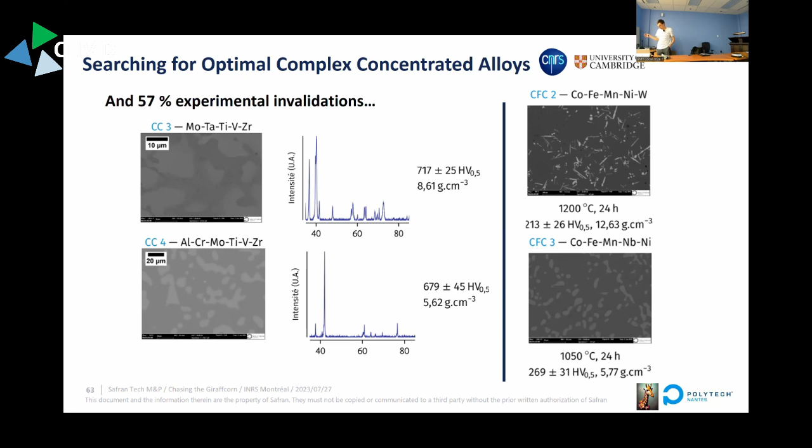We had a lot of experimental invalidation, basically 4 out of 7, which means we're not very good. But for a budget of 7 alloys out of 10 to the 85, this is still an achievement, I think. And we're going to conclude with the nitride coating design.

So let's say I live in a very different world from my colleagues. We don't use computer science, but we have a lot of experience and a bunch of luck, to be honest. So we look for very specific materials. I just want to present you 2 different materials. We are always working on HiPIMS, so HiPIMS PVD.

And we found something quite funny. When you use HiPIMS PVD with a metal, we speak about tantalum, and you just add nitrogen. So tantalum nitride, something that almost everybody knows. You have the phase diagram here, and what you can see there is the very slight blue part. This part is just a metastable state of tantalum nitride.

If you know how to use your HiPIMS PVD, you can just stabilize and get this hexagonal phase, tantalum nitride, stable, and it stays stable. It stays stable from room temperature to 2000 degrees. And the fun part here is that, as you can see, it's a ceramic. But this one is very specific. It conducts electricity. We don't understand why right now, but it's working.

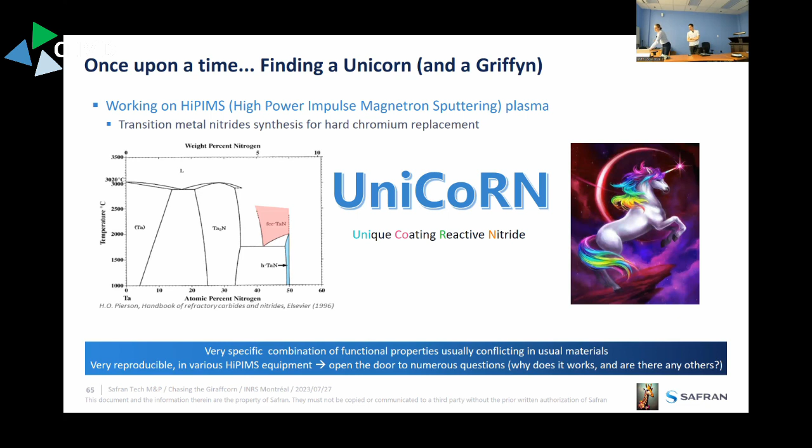And we moved to a second, let's say it's a metal nitride. Still working on HiPIMS because I really love my HiPIMS. We can do a lot of things with it. If we have a look at the literature review concerning this nitride, we have 3 phases that are reported.

So the first one is cubic. It's, let's say, the normal one, everybody can see it. The second one is the tetragonal one. It's predicted by calculation, and it was observed only 1 time by phase transition at very low temperature. And as soon as you go to higher temperature, you have the reverse transformation. So it's not stable at all. And on top of it, it's not in the phase diagram of these materials.

The last one is the hexagonal one that is predicted by calculation, never observed from what we know, and also not in the phase diagram. Where I can say I do magic every day and I'm very proud of it, is that we observed the tetragonal phase, but we stabilized it. So right now, using HiPIMS, we are able to deposit thin films of this material in tetragonal phase, stable. It doesn't move at all. You can do whatever you want, it works.

So at the early beginning of the project, we called it the Great Iffy Nitride. But as you can see, this is not iffy anymore.

It's very reproducible, and we did it in two different equipment setups, a small lab one, and a bigger one in our industrial lab.

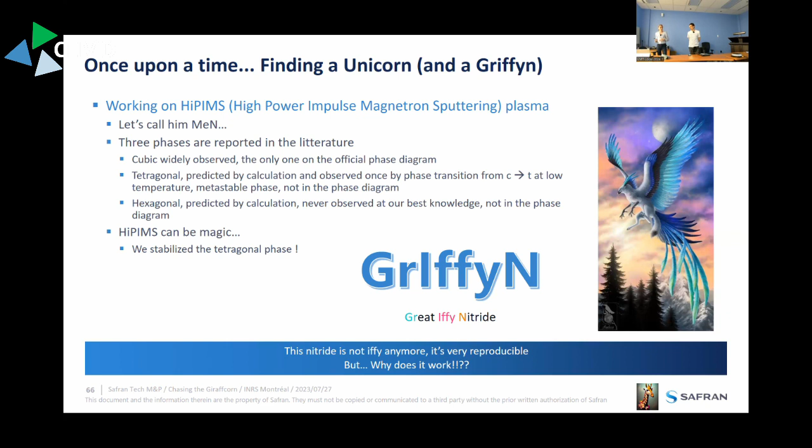So I think we can... how much time do we have left? Did we completely blow it, or are we fine? You have... okay, 15 minutes. Okay.

We can talk a bit about limitations. This is actually a slide we didn't take much time to finish because the week was full of experiments.

I'm going to talk about a few technical limitations. Obviously, there's a lot missing in the approach I showed you, and this is why I think the discussion with Kobe could be very interesting, because we don't do a lot of physical modeling at Safran Tech.

We don't do much molecular dynamics, for example, or DFT, which is clearly a missing point in all these methodologies that could really well complement what we do.

But I'm going to talk about the limits of machine learning, because I think it's very important. I put an example on top. This is from a few years back, but I think it still applies to our problems. It's in computer vision, but I think it's really the same in material science.

It's very funny because this also had a model that was trying to recognize objects in pictures. They showed that for this picture, you can't really see it, but the model was clearly seeing a banana. So that was fine. This has also been seen in CCTV footage, for example, more recently, where you put a specific pattern in the images, and the model goes wild - you can't see it, but it thinks it's a toaster.

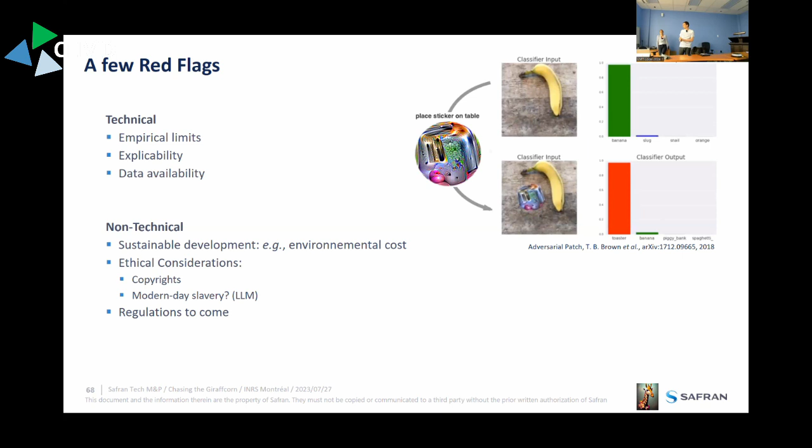But I think one application of deep learning, but not necessarily only deep learning, could help with the application of machine learning in material science: using it for mining, extracting knowledge from papers or documents in general. The idea being that we're not necessarily looking at a system that does what ChatGPT does, for example, where you input a paper and it summarizes nicely.